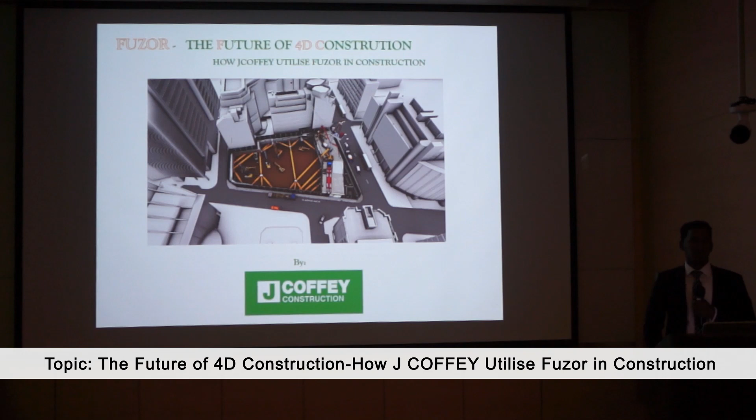Today my topic is the future of 4D construction. Henry must be happy to see the title. So how J Coffey utilise Fuzor in construction? We've been using Fuzor for the last 3 years.

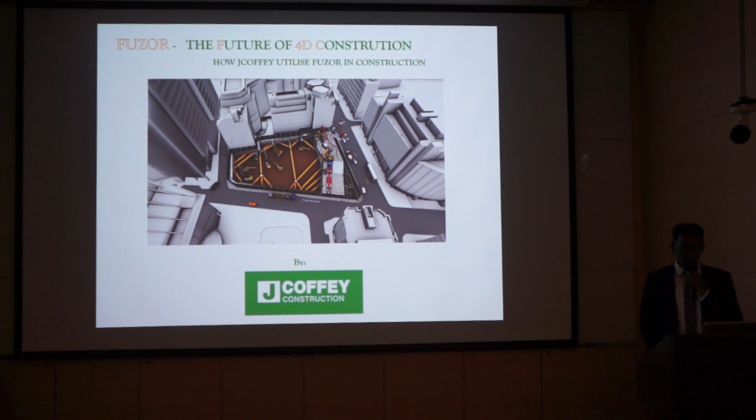I'm going to jump straight into the introduction. Before that, I just want to give a brief about Coffey Construction, what we do. We've been in the industry for the last 24 years, and Coffey Group was started by James Coffey in 1991. These are our key leaders: our construction director, commercial director, and managing director. We are a UK Southern-based construction company, and we also have a division in Ireland. We have 3 different divisions: main contractors, infrastructure, and also a plant division. We have a big plant with all the machines, everything used in-house.

Today's overview: I want to give an introduction about the traditional approach and the integrated approach. And for those who don't know what 4D planning is, I'll give a brief about it. Let's get started.

A lot of people talk about what BIM is, so I'm not going to bore you with the definition, but there are other terms also called virtual design construction, digital construction, and digital engineering. We can name many terms, but in the end it's all about the data, the information that we have. That's the most important thing in BIM or virtual design construction or the whole lot. We need to connect the relationship between the physical and digital data. When everything connects to each other and speaks to each other, the problem will be solved.

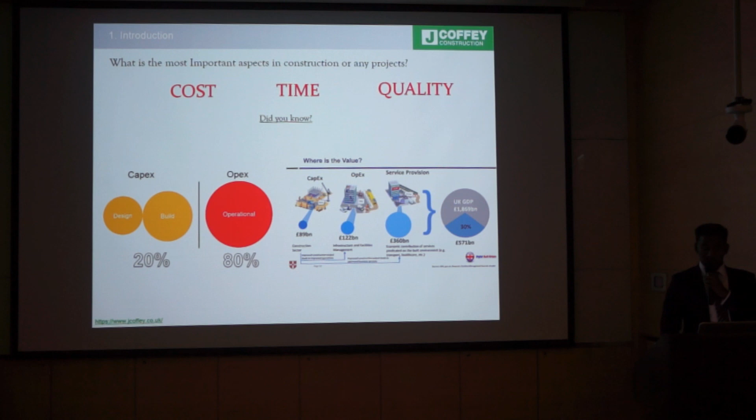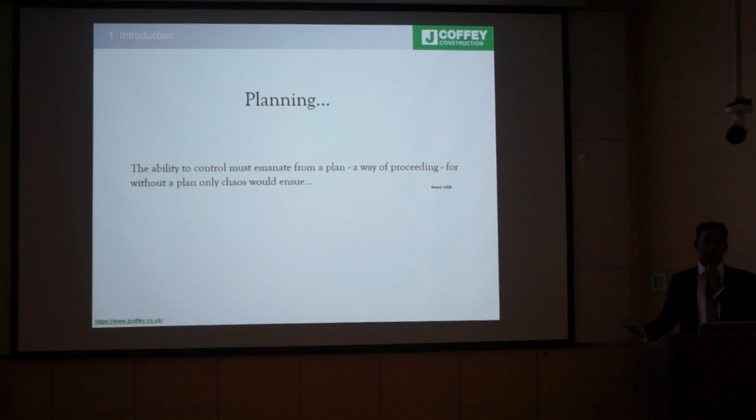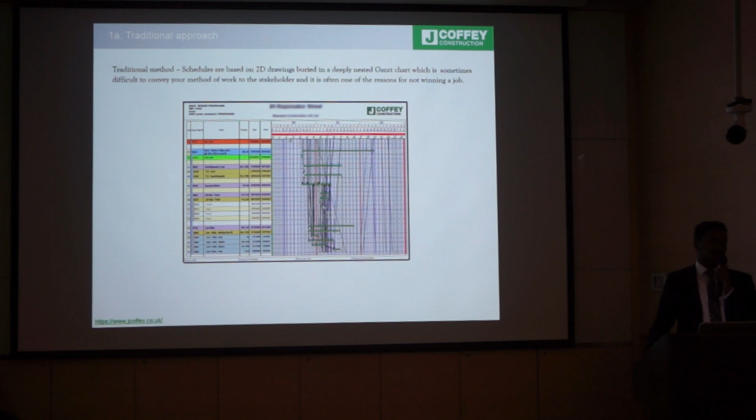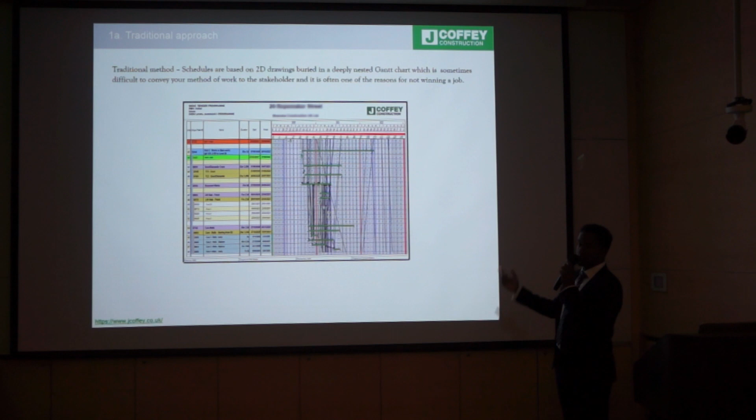With the traditional method, if you look at this chart, nobody will understand it. From a client's point of view, going through every taskbar is very hard to read. Plus, without software, you can't read it. If you have a PDF or anything, it's very hard to read.

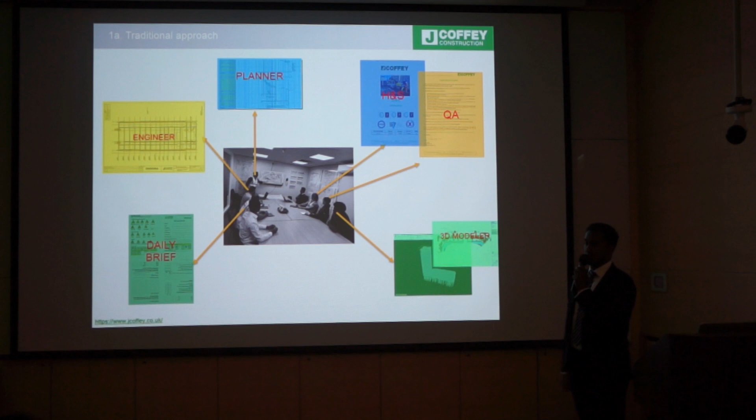Their approach was more about 2D drawings and sketches in the olden days. 20 years ago, when we worked in construction, all we did was submit a cost plan and a program. That's all we did, and our interaction was mostly with drawings and basic 3D models.

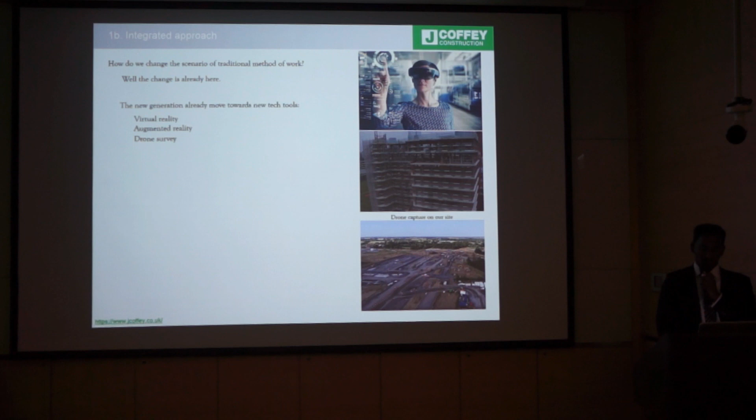But now, how do we change the scenario from the traditional method of work? Well, the change is already here—people have already started using virtual reality and augmented reality. This is some footage from our site, from Facebook Ireland that we are currently working on, and that's from Finsbury Tower.

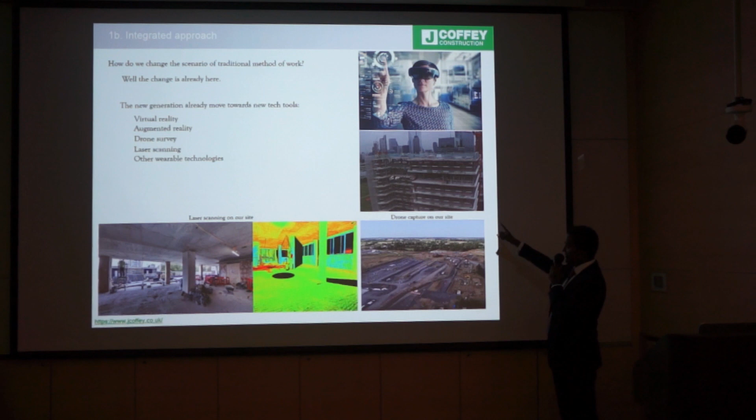Also, we use laser scanning. I don't want to talk about all the virtual reality and augmented reality—I'm more interested in the existing technology used by Coffey Construction for the past 3.5 years: 4D.

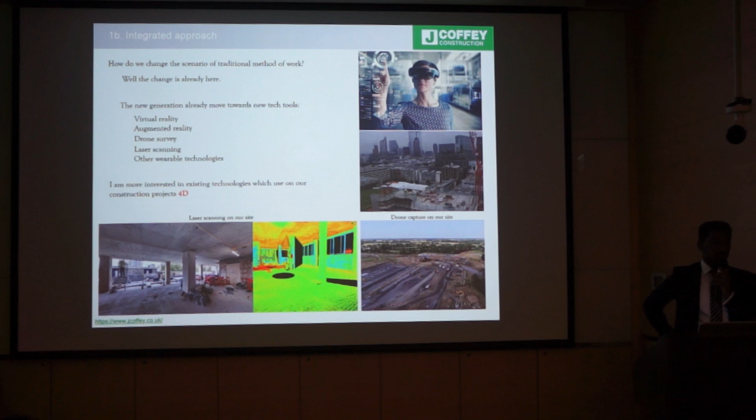This is our approach. We utilize iPads on site for every site. If the site team finds an issue, they revert the information straight away to the office, and the responsible office people need to reply within 2 days.

Our collaboration is all based on the 3D model. We not only use the 3D model on the office side, but also try to use it on site as well, so the workforce understands our method. Fuzor really helped us with a nice presentation.

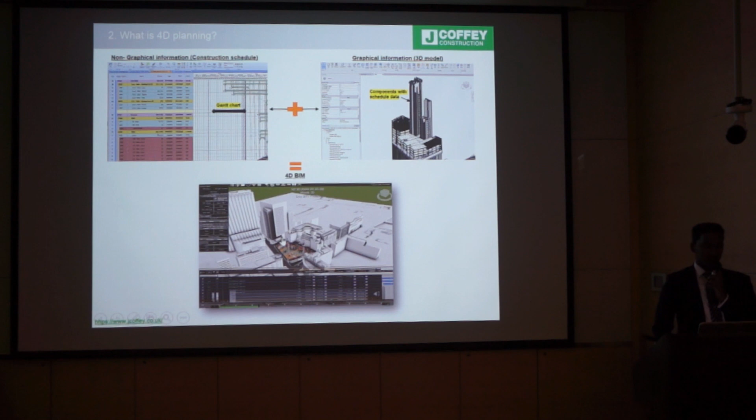So what is 4D planning? I think 2-3 speakers already mentioned how 4D planning works. Just having a construction schedule and a 3D model linked together gives you a nice 4D visual presentation. And 4D planning helps you easily track the project.

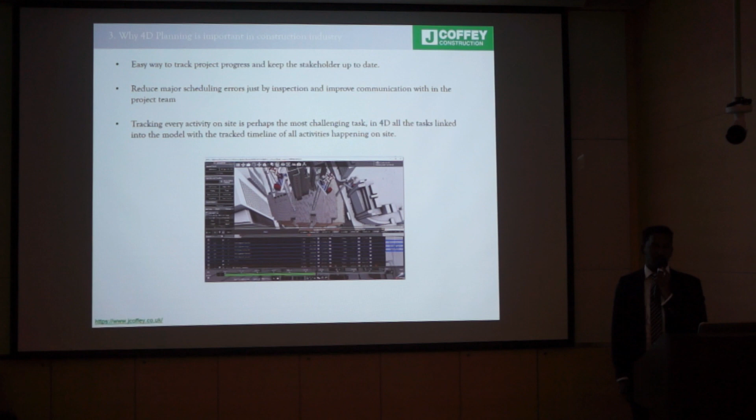You can see what's happening next year, May. Just press and play, and you can pause it whenever you want. Every element just links to each other, so rather than looking through loads of drawings, you just press play in the software and click on it to see everything.

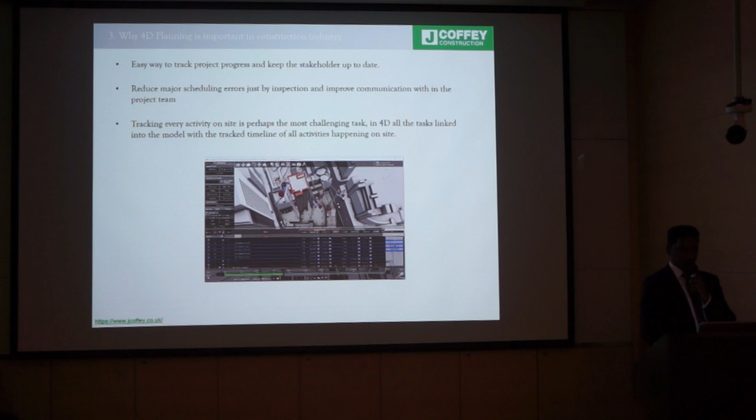Okay, we understand 4D is the way forward to overcome the planning issue, but do we have a tool that can resolve the problem? In my understanding, there are 7 points you need to ask yourself before you buy into software. Is this software easy to use? Is it user friendly? And do you get enough support from the software people?

Because we bought a software last month, and a guy came and just gave us the software. Okay, here's the software, we give you 3 days training, and start using it. After 3 days training, they're gone. Then we need to ring them up, and if we ask for technical support, they have no clue - all they do is just play by the book. But I think in this point of view, Fuzor really helped. In day-to-day issues, if you find a problem, they come straight to you with a solution, or they'll say within this time frame, we'll fix it.

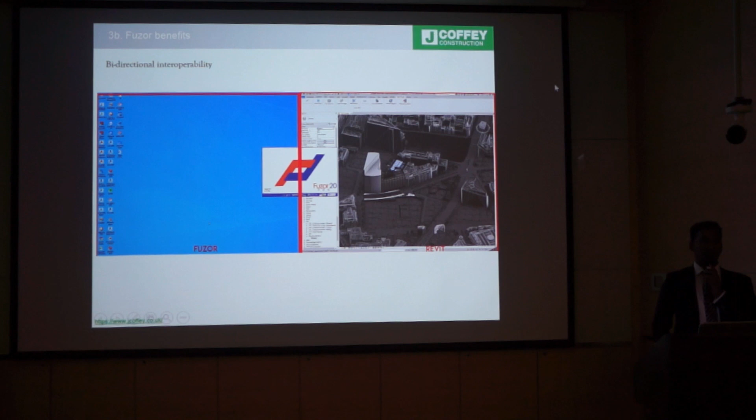Just a quick question - raise your hands, how many of you are already using Fuzor here? Okay, only a few. Okay, this slide is for you.

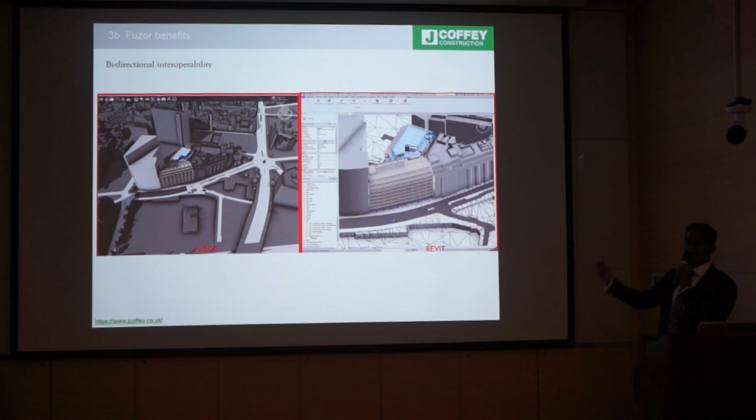If you look at the left hand side, Revit and Fuzor, tweak a bit, and this is in the contract period. We need to do detailed scheduling. For example, to build the wall in the tender stage, we just show building a wall, but in the contract period we need to have formwork, rebar, everything detailed. And in Fuzor, we can detail the program and link everything in animation as well.

We are using it for method statements - I'll show you in a minute. And here's another example of our old method statement.

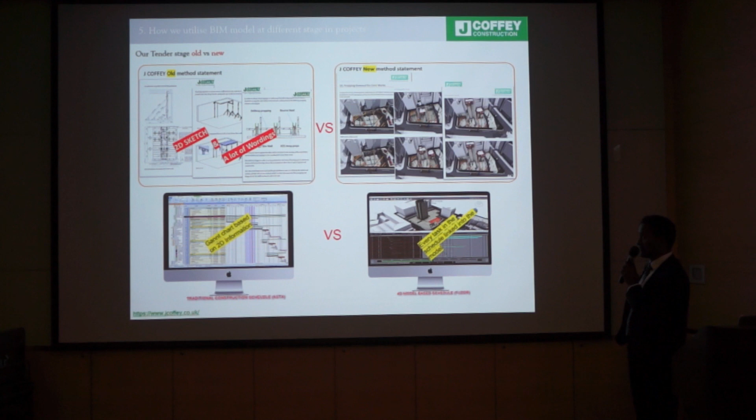Every tender when we submit, we need to produce a method statement. In the new generation, we've been asked every time, okay, how are you going to build this task, what's the risk assessment? So we need to produce a method statement. That's our method statement from 2016, how it looked.

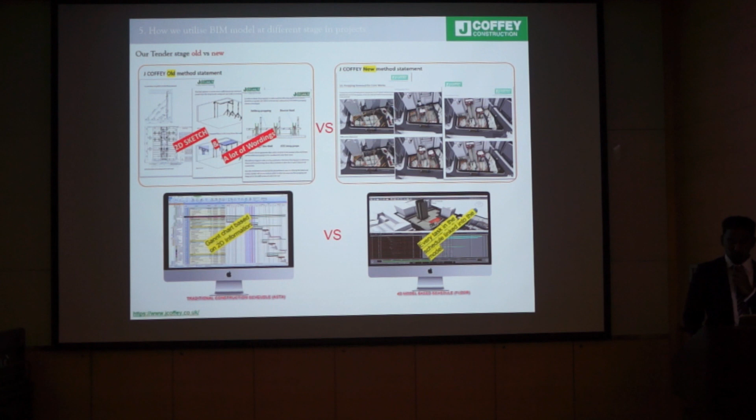And this is our new method statement. If you see from here, every task in the schedule is linked into the model. This is just a quick video showing how we improved it from pre-construction development since 2016.

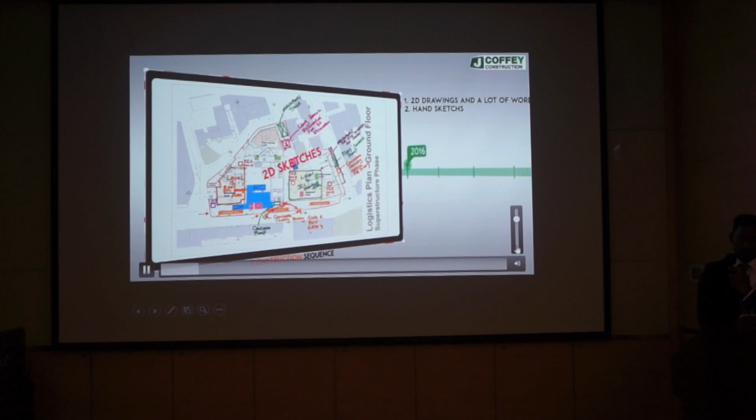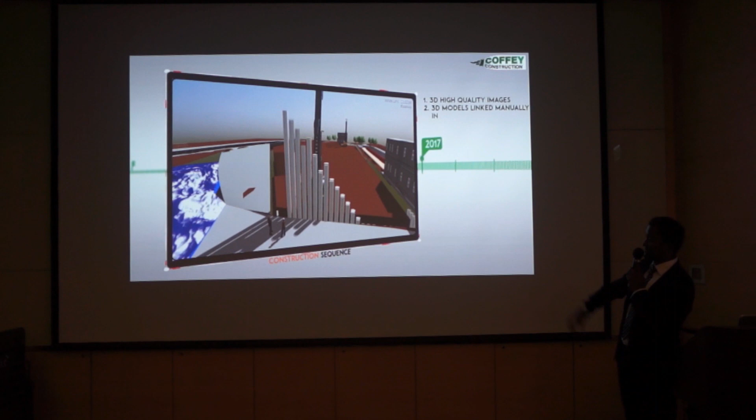If you look at the majority of our method statements and sequencing, they were based on 2D drawings, and this is in 2017 when we started fully using sequencing. If you look at the timeline below, everything is linked.

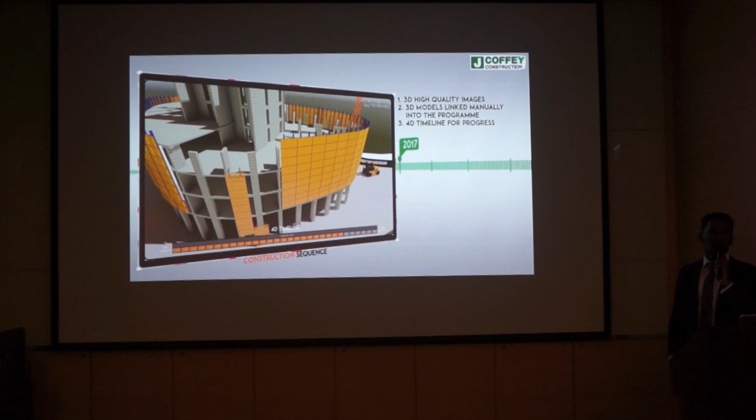And for the 3D models, we tried manual linking - everything was linked manually in 2017. This is our method statement and sequencing.

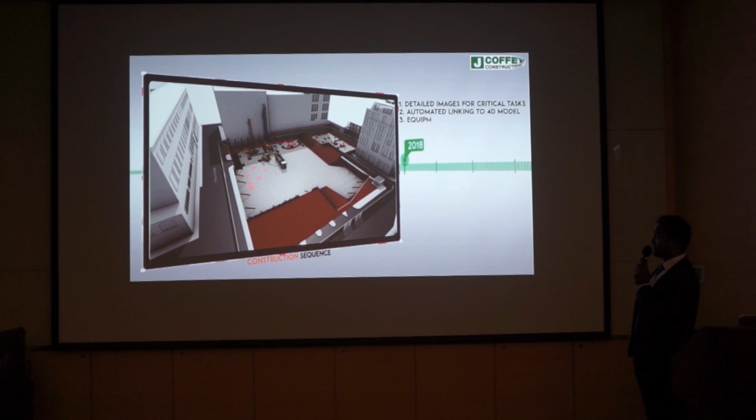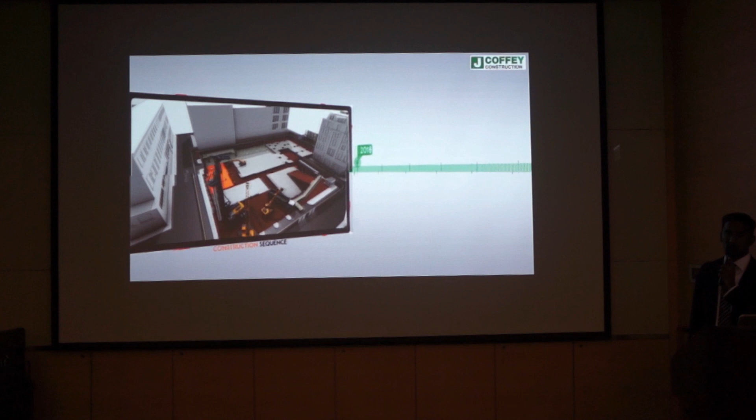If you look at some point, all the equipment and machines are linked. You can straight away see how busy the site is, and from the client's point of view, they look at it and go, oh wow!

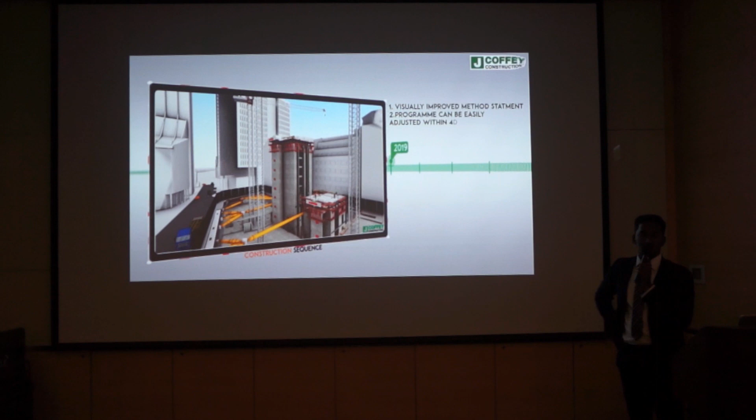And this is in 2019, we tried to use automated linking. In the future, whatever the program task name is, it automatically links into the model. And this is a sequence animation that we did as well, which is a new feature in 2020.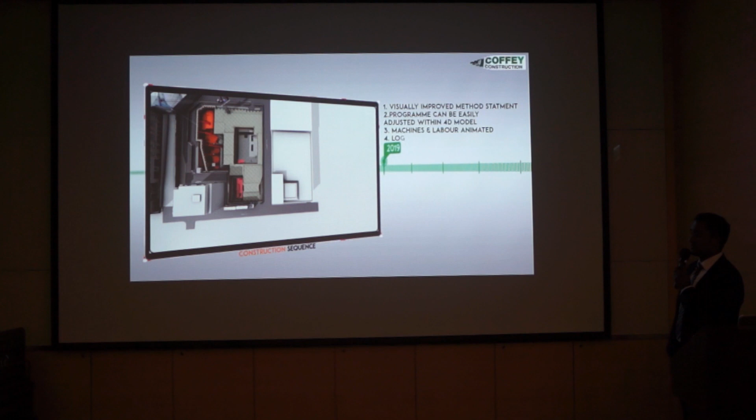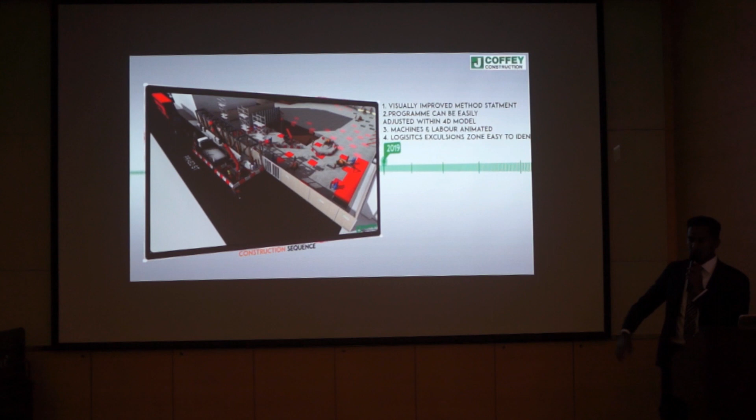We also started incorporating machines and labour-based resources within the 4D model in 2019. And the other new feature shows logistics exclusion - when you use a machine, where's the safe zone you can't enter in that particular area - you can incorporate that in the new one as well.

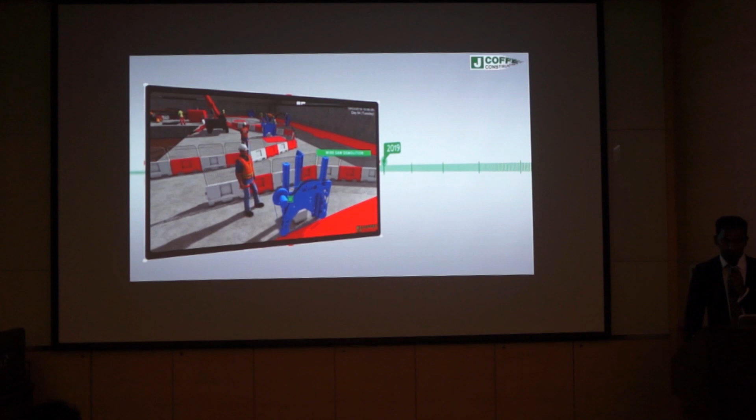This is another good example of how we utilize vehicle tracking. If you work in Hong Kong, London, New York, in a busy city, we've always had trouble getting vehicles into the site - always having restrictions on how we bring material in and out. This is what we used to do originally in 2016, like a vehicle path analysis for our client.

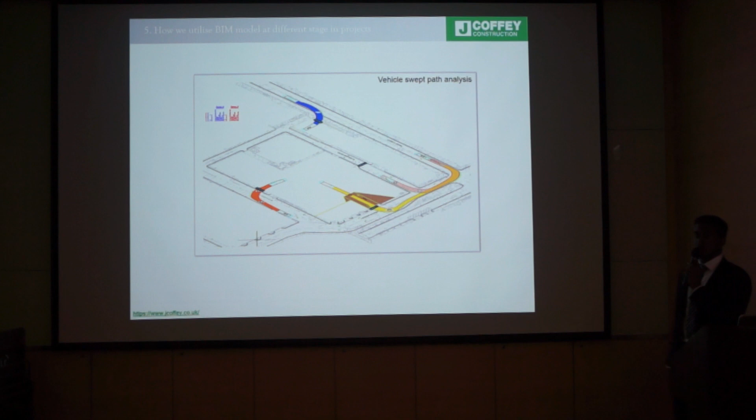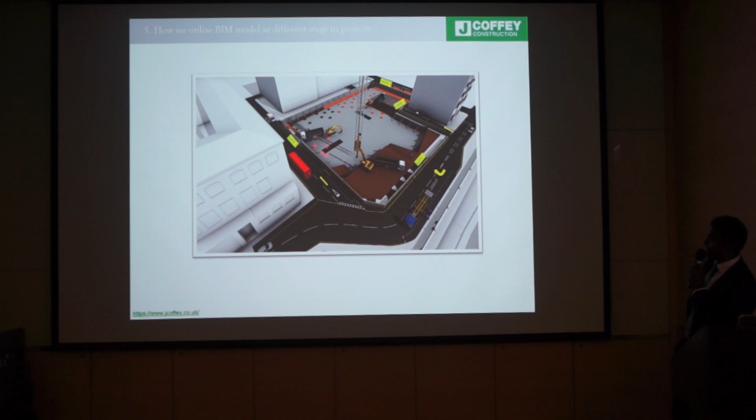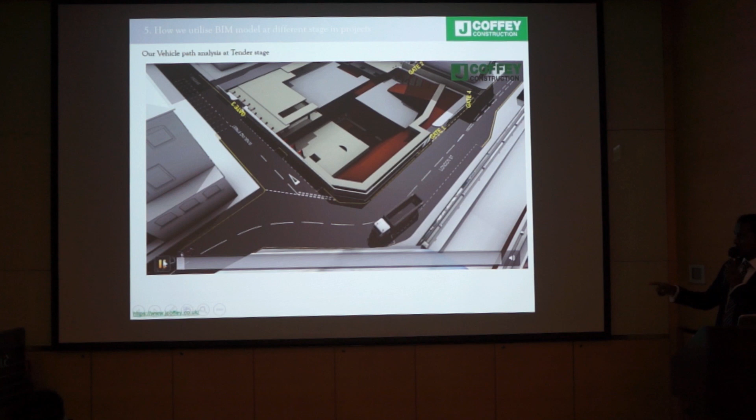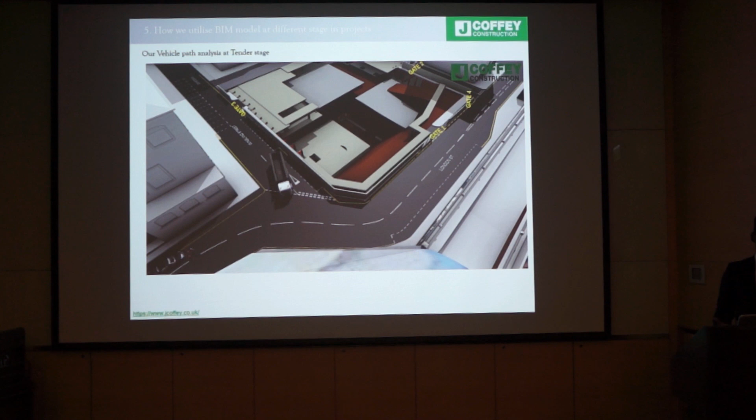And this is how we submit our new logistics approach, showing how we're going to drive vehicles through our construction site. We wanted to go one step ahead, so we did a quick animation showing our client - we're going to put a traffic marshal here, another there, and another there, stopping traffic and turning around. It shows people easily what our intention is, how we are planning to build the job.

This is a good example I want to talk more about. This is a project called Battersea Power Station, one of the biggest projects in Europe. We've been working on this job for the last 5 years.

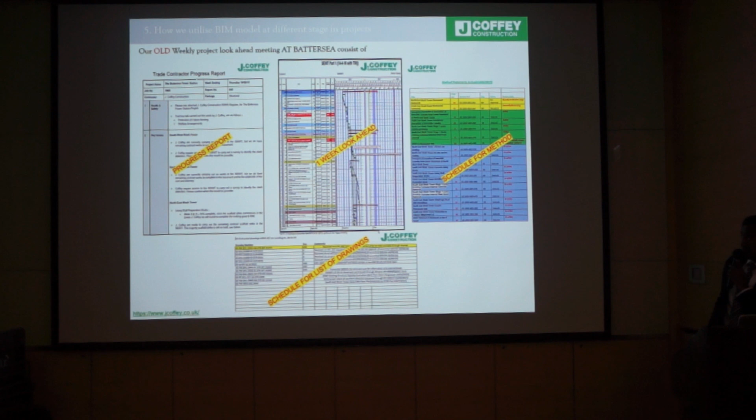This is our old weekly report from 2016. Every week we need to produce a weekly report to our client, and in the meeting room we've been discussing key issues. The key issues will be mentioned in the weekly report by trade contractor, and every key issue will be linked to the program. So we need to look at the key issue, the program, and go to the method statement to find out the method to perform the task.

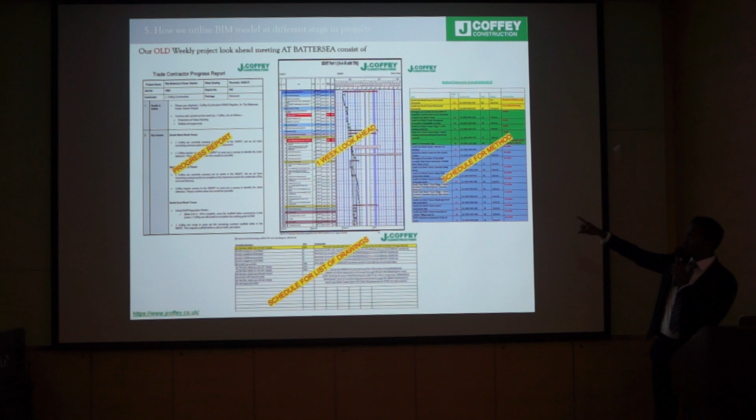So to understand one key issue, you need to go through all the program, method statement, and the list of drawings. But in our new weekly report, we actually produce a 3D screenshot from the 4D model. It shows what's in progress and what we're going to demolish, with the slab and everything highlighted visually, so people straight away understand what we intend to do. We obviously have a method statement separately, but I don't have too much slides to put in - if you want, I'll show it to you later.

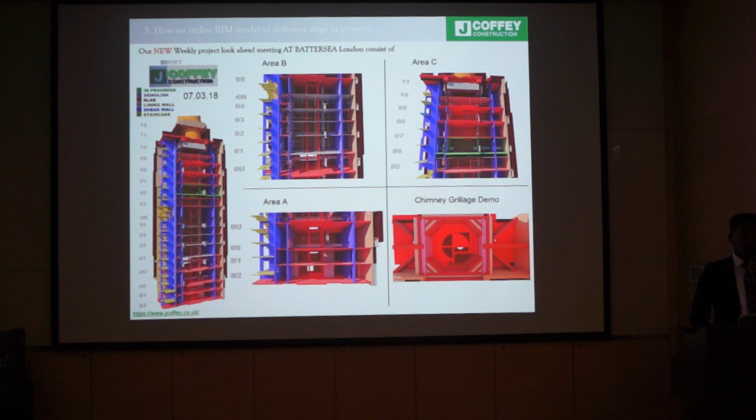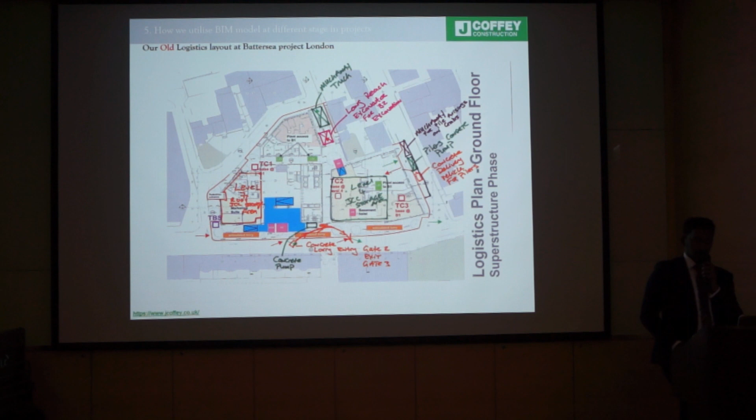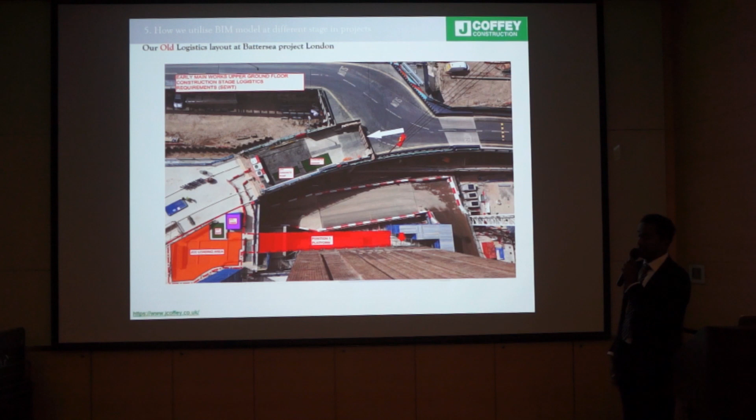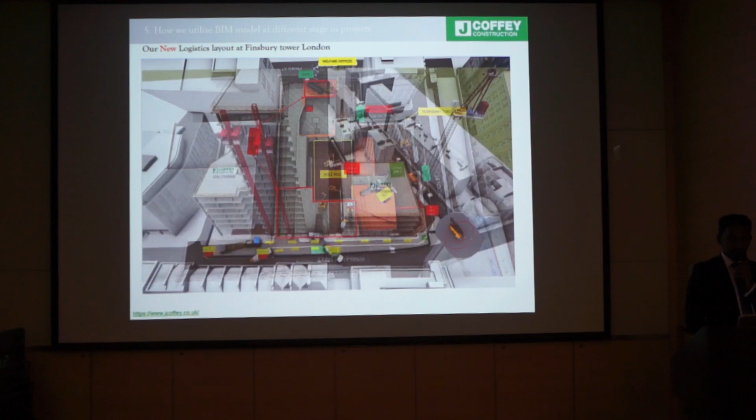This is another example of our old logistics layout at the Battersea project. This is how we used to do it - sometimes we just take an aerial image and overlay some sketches showing, okay, this is our loading area, this is our platform. But at tender stage, we try to use our new way of presenting the logistics layout, covering the loading area, vehicle movement, and the gates all in 3D visual images.

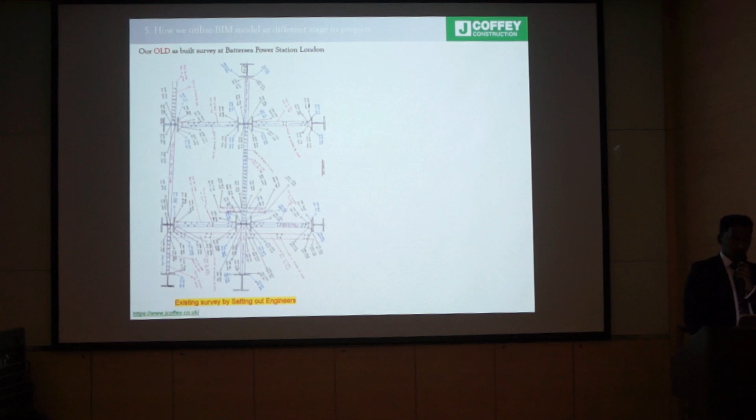This is when I joined - my first job was Battersea Power Station. We've been asked by our client to do a temporary work slab in order to fasten the work. When I asked our site engineer to do a survey, he did, because I understand it's a very complex area - you need to take all the points, and it's very hard for him to take the points in every location.

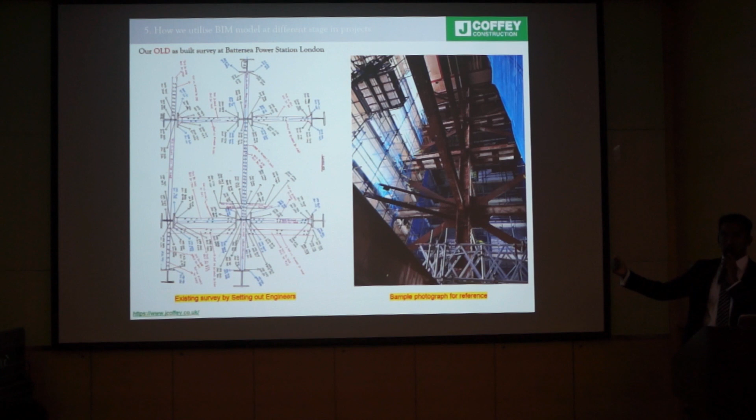So he went there and took the points, spending 2 days with 2D paper and all the easting northing coordinates. I needed to incorporate this information into the model, and some information was missing, so we had to go back and take it again. So instead, we started using laser scanning - Fuzor supports laser scanning, so you can import the model and see the existing and new together.

I was very surprised this morning when Henry mentioned that it supports Faro. My only request to Henry - we use Leica. You need to think, in the UK we use a lot of Leica equipment, and this is the RTC 360.

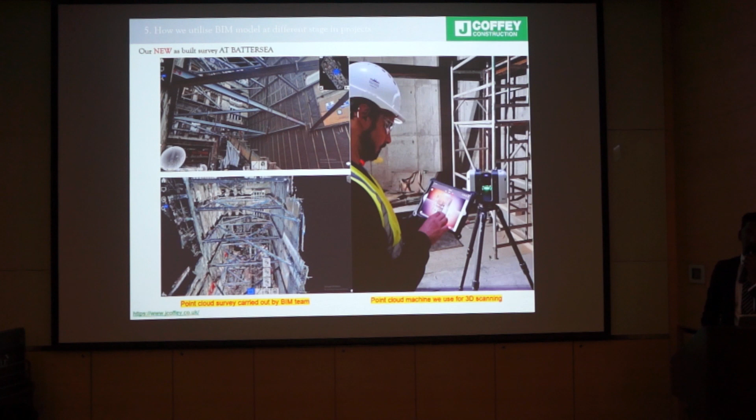Within just 2 minutes, it scans the whole area, and you can visually see in iPad how the 3D looks. Imagine just setting out engineers, setting up a machine and taking every point like a 3D scan - it gives you a whole model. We did this whole area within 2 days, instead of spending a day or two for just one slab.

Lord's Cricket Ground - how many of you play cricket? Any fans of cricket? Nobody? I'm a fan of cricket though.

Lord's is a 230-year-old cricket ground, people call it the home of cricket. We've been asked by our client to demolish two stands - this is a new development. We're going to demolish the two stands and rebuild them.

Just have a quick look at this slide, I'll run through it with the video. These are the key requirements we need to consider for this task. First, we need to demolish the existing concrete stand, which is 2,300 meter cube of concrete that needs to come out of the site, taken from the city and taken elsewhere, which requires 270 lorries to come on site and take it out.

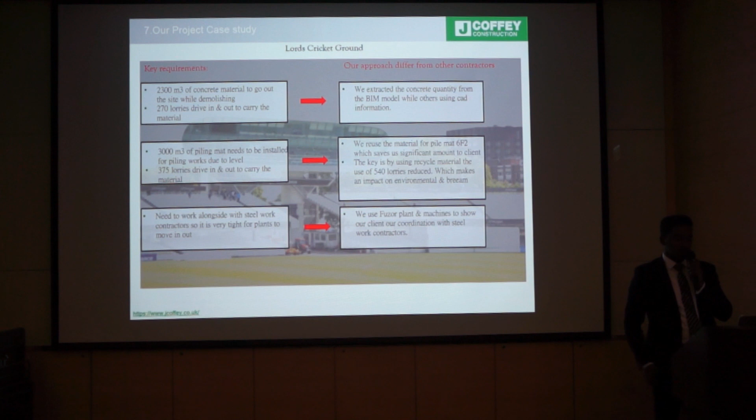Also, we have a piling mat to do piling works, requiring 3,000 meter cube of material to be brought in as well. And we need to work along with steelwork contractors - I'll show you in a minute how we use it. So this is the two stands - if you look at it on the left and right hand side, we need to demolish everything and rebuild it.

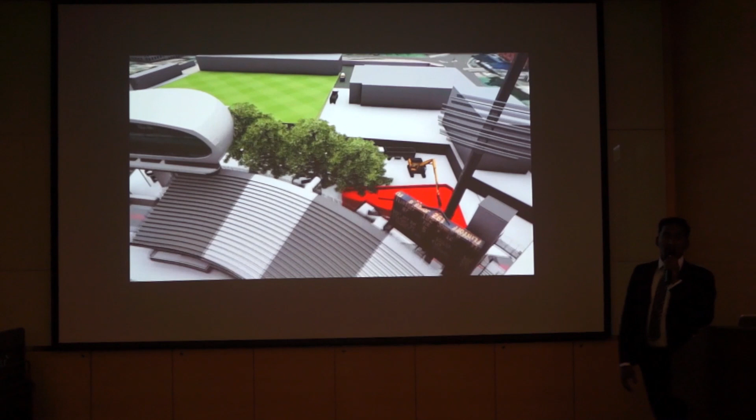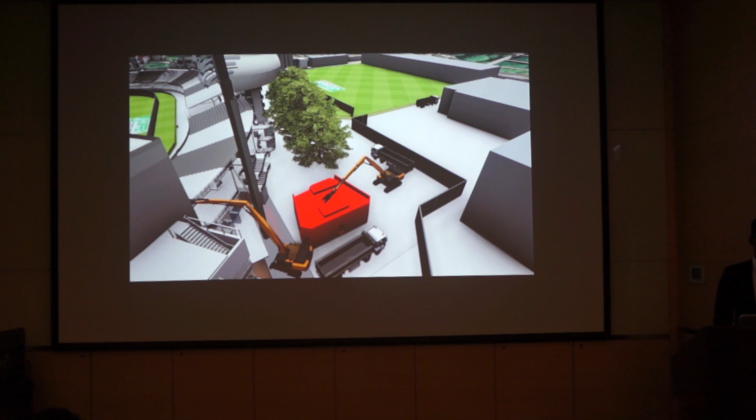So what we did compared to other competitors, we took the model and the quantity takeoff while everybody else is just using a CAD drawing. We model everything, and if you look at it here, everything is linked into the model. There's nothing lying behind it, it's just everything linked with the program. So if you look from the left hand side, all the equipment and machines are linked.

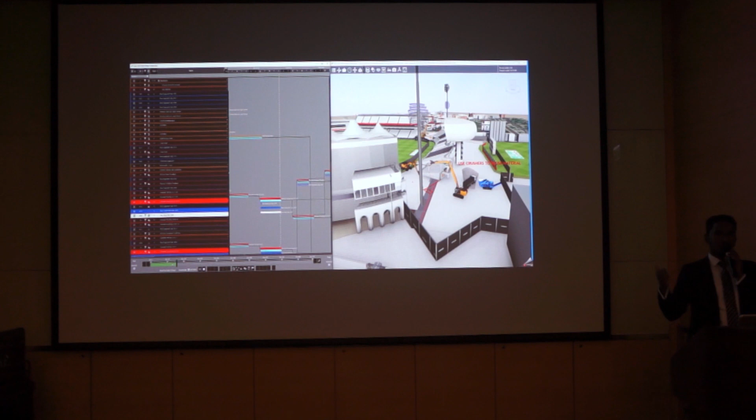And if you look at that, that's a crusher. So instead of taking all the materials out and bringing in new material, we actually crush the material and reuse it to lay the piling mat, which saved quite a lot of money.

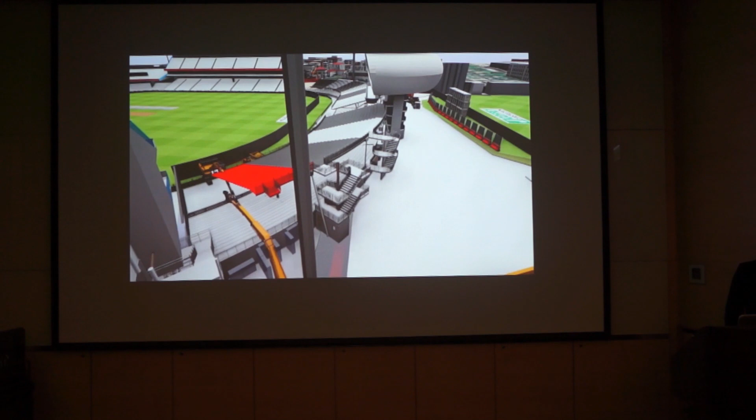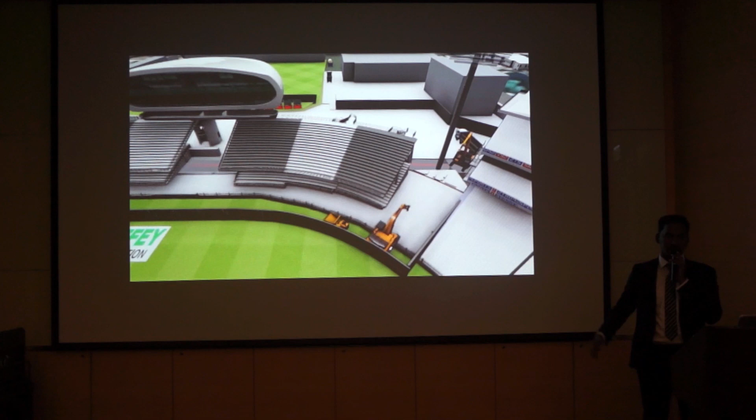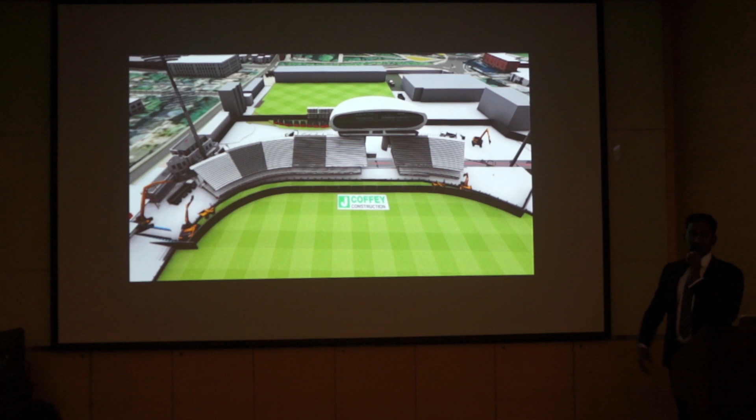That's the whole idea behind the UK government and the Hong Kong government trying to push and implement BIM on every project. In the UK, all government projects are BIM mandated. The reason they want to mandate it is to make sure they understand the benefit of using BIM and technology, and how it influences the industry. If you look at the piling material, we actually reuse all the material from the existing site.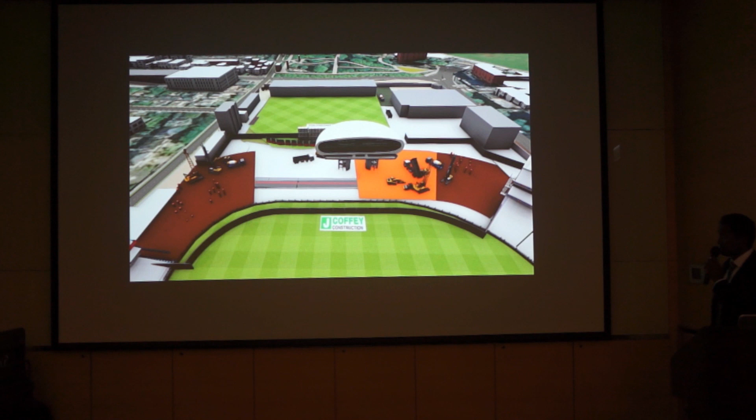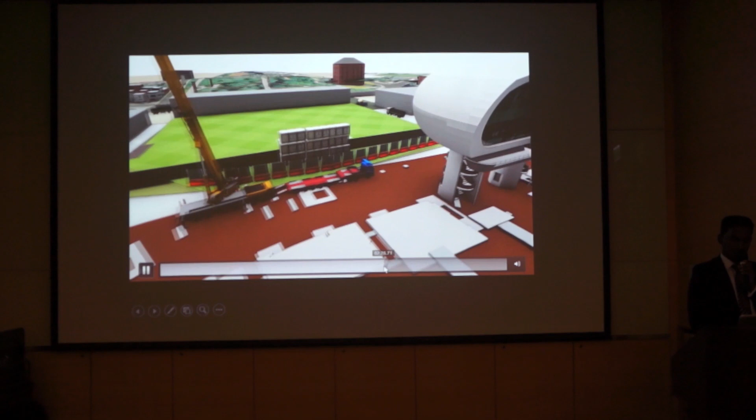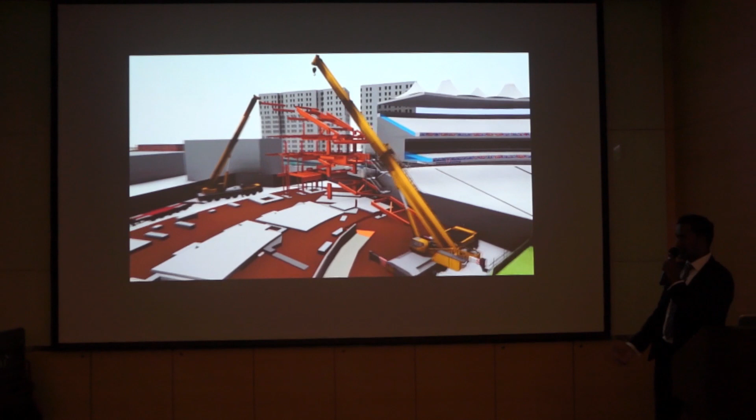The other thing is we need to work along with the steelwork contractor as well. If you look further, the steelwork contractor actually works on the side, they have a massive mobile crane plant, and we are working on the front as well. So we just try to show our client how we actually perform, how we're going to perform the task.

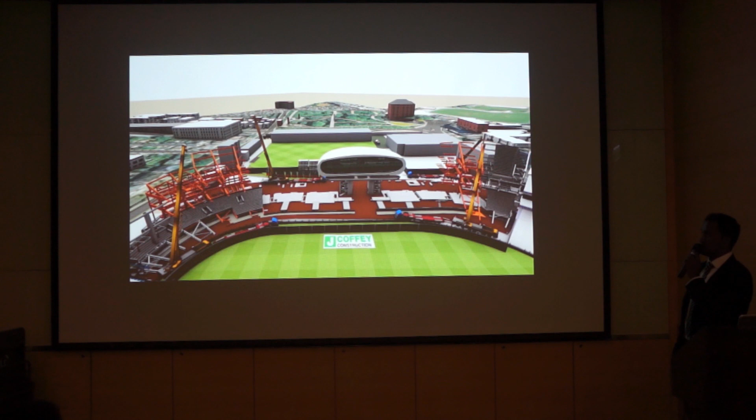They said they didn't understand, and this was one of the important things that won us this job as well. They asked us to give a presentation too. How did you manage to do all this? How long did you spend? I actually spent a week putting everything together, all the videos and integration with the steelwork contractors.

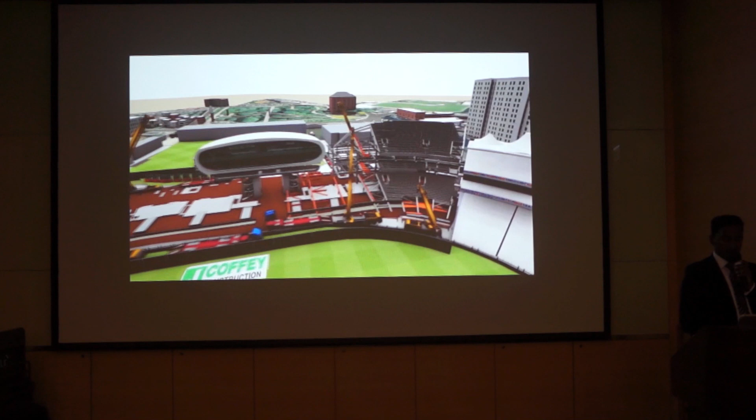So, return on investment - this is my last slide. When I first started in our pre-construction department, our estimator used a scale ruler and a PDF drawing for markup drawings. That's out the window now, we're not using it anymore. Everybody's focus now is on the 3D environment model.

Also, there's improvement in methodology. If you look at my previous slide, my old method statement was like a 2D drawing, but in our new method statement everything is a 3D model with visually rich images as well. And when you revise and rework, every time you make changes it automatically updates, which is a really cool feature. Collaboration between team members has improved, and time spent on tenders is down to 30%.

Our tender size has also increased marginally. And director adjudication is very crucial for us, because the directors don't actually get involved in the tender stage until the submission. They'll just come and sit with you and ask, how are you going to build this task? What's your plan?

When you look through all the drawings, it takes you all day to understand the job. But if you just press play on the video, they'll understand straight away - okay, this is how you intend to build the job. So the adjudication becomes a lot quicker internally, and also from the client's point of view.

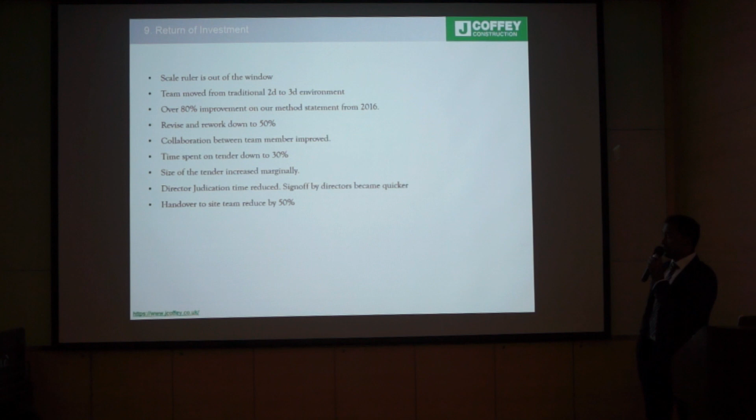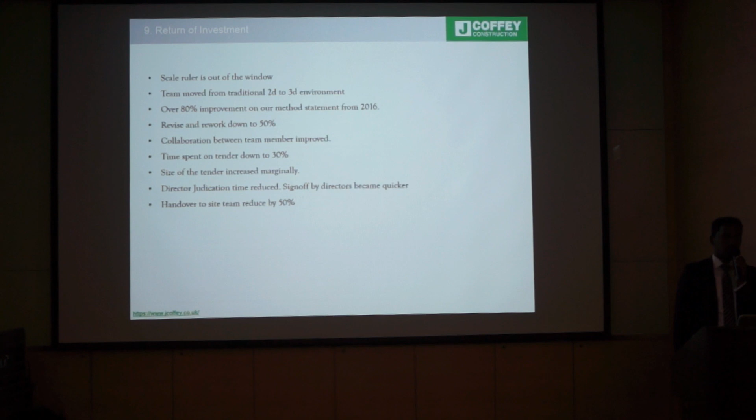And handover to the site team is reduced by 50% as well. After pre-construction, we need to send it to the post-contract team, which is completely different - we need to explain to them. So instead of explaining with 2D drawings, we just produce a method statement at tender stage, to make sure they're just following our methods.